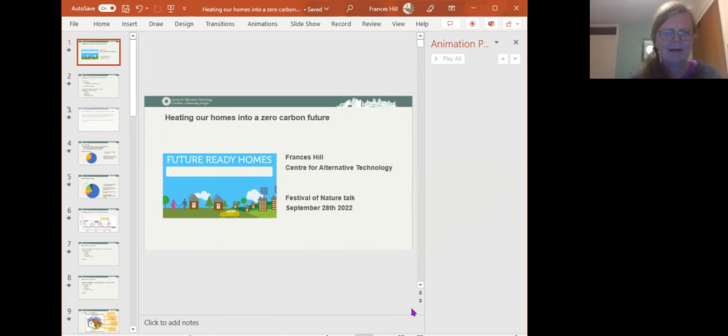Sorry, not entirely used to Zoom. Are you trying to put it into presentation mode? I am, there's a little icon just above design. All right, I've reached it, it was hiding behind my bottom bar there. Okay, there we go. Thank you.

Yeah, I teach through Microsoft Teams, which is a similar tool but different. They're all different. So yes, teaching at the Centre for Alternative Technology, we work more at the domestic level in terms of looking at zero carbon heating. Although we certainly do touch on commercial buildings as well, such as supermarkets, and the modelling of buildings to learn more. But fear not, I'm not heading onto supermarkets today.

So heating our homes into a zero carbon future, having our homes ready for the future, what do we need to do? We're going to first look at the challenge this evening, look at the current demand for heating and the current supply of energy available for heating.

We'll look at some routes to solutions, including insulation and air tightness to reduce demand, and alternatives to gas or oil, which most of us currently use for heating. These, of course, include electricity, hydrogen, heat pumps, and the possibility of heat networks.

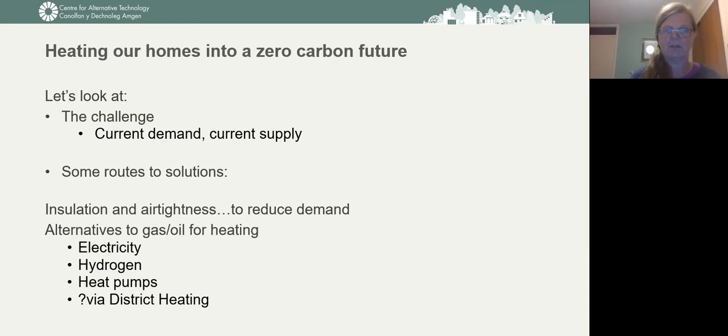So a statistic that is bandied around, or not necessarily with this number on it, but something like this: 41% of our energy is from renewables, which suggests that we're well on our way from not having had renewables essentially 20, 25 years ago, beyond burning wood. We're well on our way to being entirely energy supplied by renewables.

But how does that fit into the domestic energy use data, which we've got here? You can see that the majority of domestic energy use is gas, with 6 or 7% from bioenergy, 6 or 7% from oil, and maybe 25% from electricity. Very little anymore from coal.

So which part of that energy is from renewables? 41% doesn't readily fit in there. Well, in fact, about 3/4 of our energy is from fossil fuel, and about 1/4 is electricity. And that 41% is just 41% of our electricity provision that is from renewables.

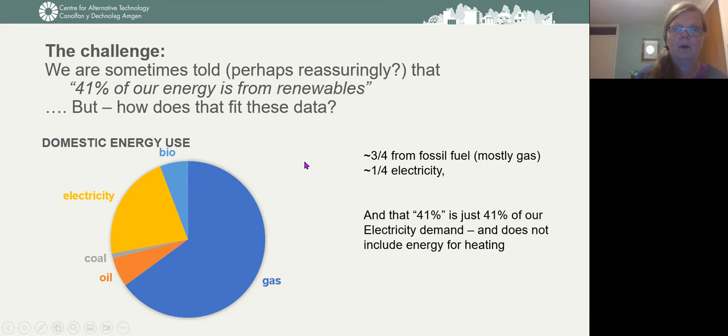So it's sort of that much of our energy supply, our energy use, not just our electricity use, our energy use. So that 41%, of which that is 41%, doesn't include the energy we use for heating, which makes it a wee bit frightening, really, when it comes down to it.

I mean, this is the electricity from renewables. We then have electricity from fossil fuel. We have electricity from nuclear, which is perhaps carbon neutral. Various people would argue in various directions on that.

All right, I need to keep moving my screen of people around so that I can see what's behind it. And if we think of biofuels as renewable, and that's contentious, because once you've taken a tree out of production and you burn the carbon, it takes a long time for that carbon dioxide to be sequestered again into the next tree that you're growing in the same plot, or the next tree you plant.

So these are the renewables, this is the energy from renewables. These might be considered low and zero carbon, but that still leaves 80% of our energy use as not even counting in those. So we've got quite a challenge if we're going to move not just our electricity demand, our current electricity demand, into renewables, but all of our energy demand into renewables.

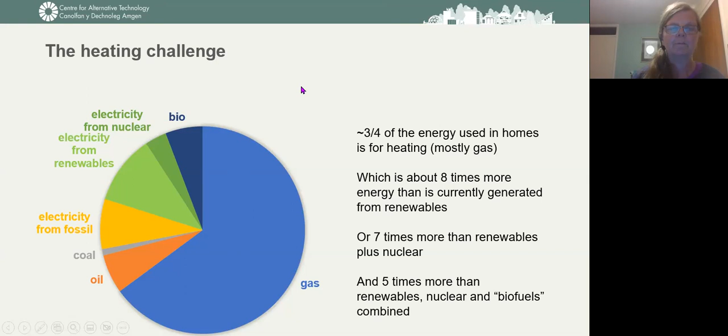Are we going to multiply up the energy electricity we're generating by a factor of 8 in order to be able to use electricity for all of this? That's a lot more wind farms, a lot more solar. We can probably do a lot. Can we get there?

The other side of the question is that heating demand is very seasonally dependent. And although this is the power that's generated sort of through the year, with more being generated in the winter than in the summer. That's hardly surprising. We're using our lights more in the winter than in the summer. We're driving more heating systems, as in, the pumps in heating systems and whatever else we're using more power for in the winter than in the summer.

That varies seasonally. But look at the heating demand, that's varying hugely. Can we actually supply all of the heating, all of the energy we need, the power we need in the winter, even if we can supply an average of the energy around the year? Transport is more even on here.

And yes, when we get something like the Beast from the East, this data run finished about 4 years ago, just after the Beast from the East, then we get a spike that's considerably higher than that, when our heating demand goes up very considerably. And we need to think, how can we provide for all of that heating dependence?

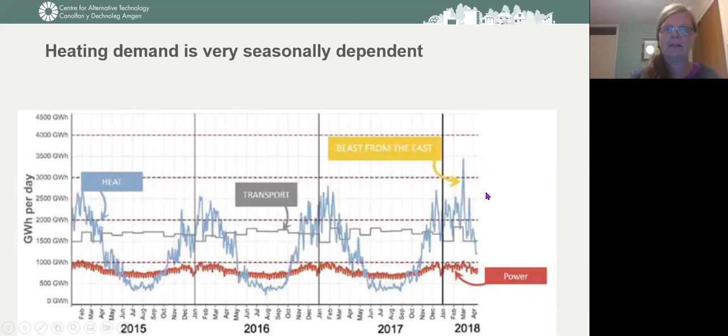So various different routes that we need to look at to solutions. We'll look at insulation and air tightness, but I think many of you will have been at Flo's talk on her house on insulation and air tightness, so we won't take a long time on that, but it is important. And we'll look at heating controls to reduce demand, and then alternatives to gas and oil. So first of all, insulation.

Looking at a standard house, where do we lose the heat from? You'll have all seen a picture something like this, with probably somewhat different figures on it. And all of our homes vary. They vary on how much of the external envelope of the house is walls. They vary on how much insulation there is where, and whether we've got double glazing.

But a broad picture average of home energy loss is that we lose maybe 25 to 30% through the walls, maybe 15% through the windows, maybe 30 to 35% through the roof, a lot through ventilation or air change. Ventilation is sometimes limited to mean intentional ventilation. I think here it's meaning all the air that comes and goes to the house that you didn't really intend to, as well as what you did. And then some up through chimneys perhaps, and out through the floor.

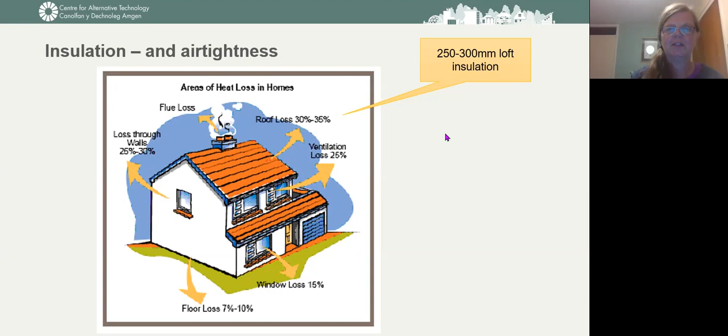We want to stop drafts and organize the ventilation so that we've got enough airflow, but not losing heat through the airflow more than we need, at least. So either extract ventilation that is perhaps humidity controlled and sits in your kitchen, your bathrooms, so that you're extracting from the smelly, damp places in the house, and unless you've got a really, really good airtight house like Flo, you're almost certainly going to be able to draw in enough air through the cracks and crevices that the house doesn't implode on itself. It won't implode on itself, don't worry about that.

Or mechanical ventilation with heat recovery. So that's balanced intake and extract ventilation with a heat recovery between the incoming air absorbing the heat from the outgoing air.

We want to insulate our cavity walls. Those of us who've got cavity walls, we may be wanting to insulate internally. We may be better off insulating externally, because right across the middle of the house there's floors that come to the wall, and insulating internally down to the floor and then up to the ceiling below, you've got quite a gap there that is really hard to get at. And you've got a problem with bridging there. So you're going to lose heat more readily through the area you can't insulate.

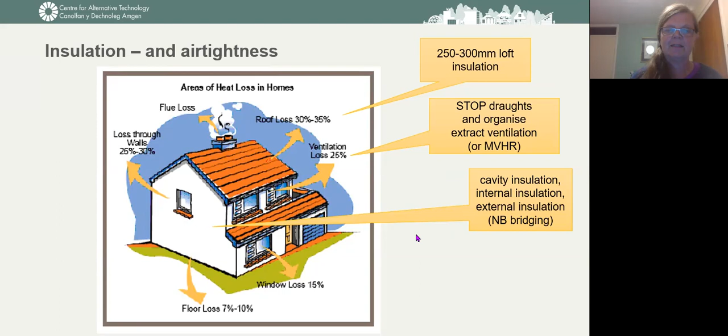And you're going to have a cold wall, usually with timbers going into it. And that can be a problem, because that's where moisture gets into the wall and into the timbers in the wall. And you don't really want moist, damp timbers sitting in a cold place where they could rather readily rot.

And then, you may be surprised that this doesn't come higher up the list: double or triple glazing. A glazing replacement is not a quick win. It's quite neat and easy to do compared to a lot of the others. It's quite expensive, and it is important to do it, but it doesn't necessarily come above these other measures that you can take.

Make sure double or triple glazing is carefully installed, because when we go back to stopping drafts, a lot of the places where you get drafts are around the frames of windows and doors and skirting boards, around ceilings and around lighting fittings and that sort of thing. But particularly there's a lot of edge around windows, and if they're not well installed, then they're hazardous for drafts, but heat loss around them as well.

So find somebody who knows how to install windows well. There are examples in Wilmslow who do it well, and there are examples in Wilmslow who don't.

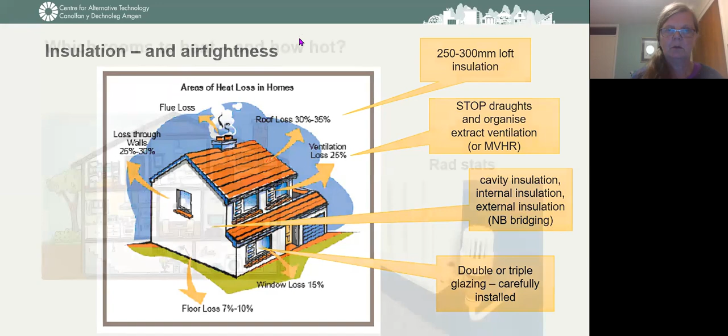So now we've got a house that's insulated as well as we've managed, draft proofed as well as we've managed. But even before we do that, we need to think about which rooms are we going to heat and how hot are we going to heat them to? Do we need to heat every room in the house, whether or not we live in it all the time?

Some of us may be able to have homes that have rooms that we don't use on a regular basis. Do we shut the doors on them and leave them to cool down a bit? Or do we heat them sort of to the same as every other room? Questions to consider there. How hot, how warm do we need our homes to be? Do we need the same temperature in every room? Or can we use radiator thermostats to control the temperatures in the different rooms?

Maybe you want a bit of heat in all the rooms, but you don't need as much in quite all of them. You need a higher temperature when you're sitting down still. The room I'm sitting in at the moment is my home office. I share it with the hot water cylinder, the airing cupboard. It was a bedroom once, and it has the airing cupboard in it.

And that means that whenever the well-insulated hot water cylinder leaks any heat from it, and it does through the pipework to and fro, whenever it leaks heat, I actually benefit. So I sit here bathing in waste heat. Well, the room stays a degree or two warmer than the other side of the door as a result of heat losses from that. In the summer, I can open the window. It doesn't need to worry me that I'm getting extra warm then.

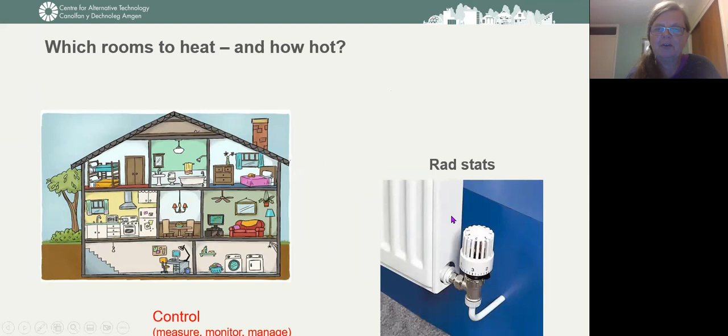So, and then, control, measure, monitor, and manage. Control the temperature, measure it perhaps, use a thermostat to measure it and manage it that way, and possibly manage it by additional controls. Avoid heating unnecessarily, use a timer. I'm aghast when neighbours go away for the weekend and I see the steam plume out of their boiler pouring out into the air. For a start, a boiler shouldn't particularly have much of a steam plume if it's been well

commissioned. A bit, yes. But if you're away for the weekend, how much heating does the house need on? If you're away for the day, how much heating do you need on? Do you need the whole house as warm at night as you need some rooms during the day? How can you manage that?

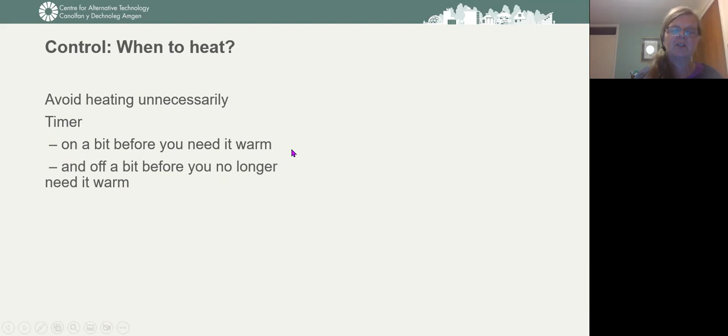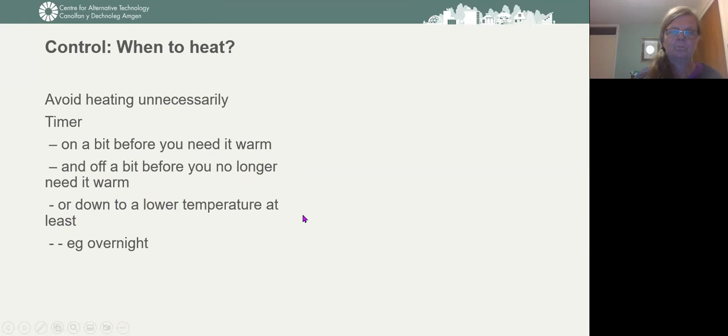So suggestions for a timer: that you might have the heating on for half an hour before you need the house to be at full warmth, and probably be able to turn it off half an hour before you no longer need it warm. Or maybe just turn it down to a lower temperature at least, for example, overnight. Do you live in a castle or do you live in a tent?

Some of our homes are thermally massive with a lot of hard stone surfaces that absorb a lot of heat as the sun comes in, or even wooden surfaces can do that a lot. But carpeted floors insulate the floor, so heat isn't absorbed into the floor. A castle takes a very, very long time to heat up. But a yurt or a portacabin, which is perhaps more familiar to us, just not as attractive as a picture, is much quicker to heat up.

You can pop a wood stove in the middle of a yurt and you can very quickly have warm space in there. Appallingly badly insulated. I'm not advocating living in a yurt, not in a British climate at least, but they do heat up quickly because they've got no thermal mass in the walls to absorb that heat. A portacabin's like that, a site hut. You go into it, you can put the heating on and it'll be quickly hot. Turn the heating off and it doesn't hang around.

Whereas your castle, if you've got a room warm, and you may never be able to get a room warm in a castle, or many churches struggle with getting warm, they take a long time to cool down again. They hold on to that heat and they keep redelivering it. So is your home more of a castle or more of a portacabin, more of a tent? That will determine how long you need your timer on before the house really is warmed up, and how long you can turn it off before you no longer need to be comfortably warm.

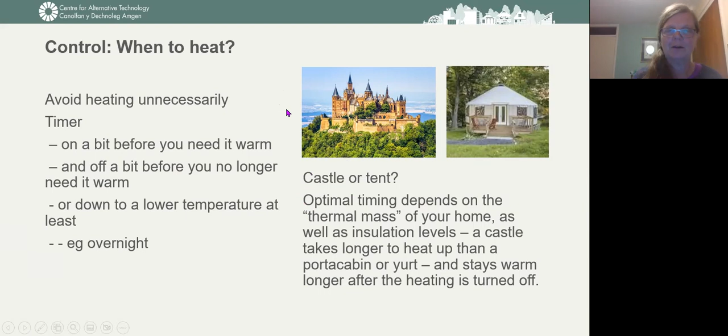I mean, if you were living in a castle, you can let the fire die down or whatever a few hours before bedtime, because the walls will still be as warm as they ever were, unless you're relying on the radiant heat from the fire and enjoying that. That's a different story.

So smart controls, of course, are quite possible by phone or by tablet or whatever. Now, remote timing, managing your central heating from a distance. When you're on the way home on the train, you can turn it on.

Hopefully you've set it so that it'll go off when you leave the house or before you leave the house in the morning. It may even include GPS, sensing when you're on your way home and turn it on for you. It may include weather reference, so that when the weather's warmer, it reduces the heating. When it's colder, it turns it up for you, or it turns it on sooner and gets it ready.

These sorts of controls may have multiple users, so different members of the household may be able to manage it. I could quite imagine that that could enable quite a lot of contest between different occupants of the house. Ever noticed anybody else going to change the thermostat that you thought was okay? We don't all want the same things. We don't all necessarily feel it works the same way.

But anyway, some of these smart devices can learn household habits, so they can expect that the house is broadly likely to be empty Monday to Friday between 8 and 5 or whatever like that, and keep the heating turned down at that point, but have it ready for people to get up in the morning at 6:30 or 7 o'clock or whatever the household needs. And yes, they can cope with daily patterns across a week, as well as hours across the day.

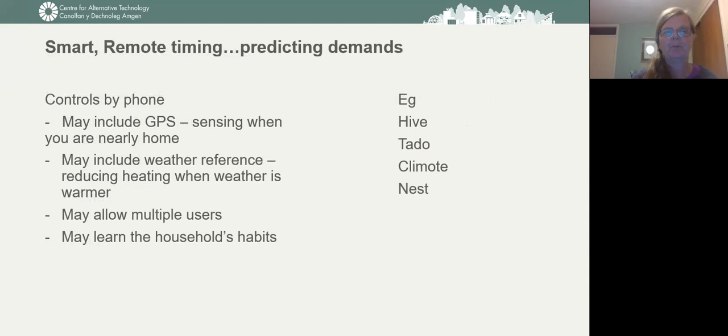Examples of these smart ones, there will be more, but Hive, Nest, Tado, Climote are names that come up for smart in that sort of way. So we've looked at controlling the heating demand. We've done that as much as we can, or we're going to do that as much as we can. How are we going to heat our homes?

We know that we can't go on using gas and oil, burning hydrocarbons, producing carbon dioxide, increasing the level of carbon dioxide in the air. And anyway, there's a limit to how much gas and oil there ever was. The Centre for Alternative Technology, where I teach, started 45, 50 years ago, actually looking at alternative technologies being needed because we were running out of gas and oil. Of course, the focus has changed to looking at climate change, looking at sustainability across the environment, as well as climate change. But we've got a lot of reasons to be moving away from gas and oil.

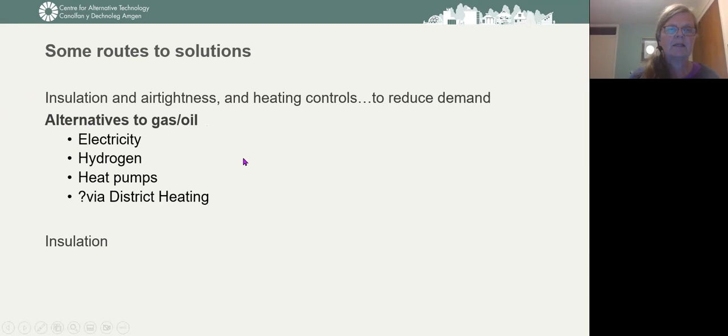So let's look at electricity, which we know how to do very easily. We've got fan heaters, we've got radiant heaters, we've got radiators, which aren't radiant heaters, they're mostly convectors. And we've got combinations, and some of them are smarter, and we might choose different types for different reasons. But over a year, we're going to need more electricity than we're currently generating from renewables if we go this route of just using electricity to produce heat.

And we're going to need 6, 8, 10 times more in winter than we are in summer. Can we generate 6 or 8 or 10 times more in winter than we can in summer? Anybody who's got PV on the roof, does yours generate more in winter or in summer? Well, I'm guessing I know the answer and you know the answer. And it's not the way around that we want it.

It does tend to be windier in the winter, not necessarily that much windier, not necessarily 8 or 10 times windier in the winter. And sometimes we get really quiet spells for as much as 3 weeks at a time. So we're definitely going to need storage.

We can store heat. If you wanted to store enough heat to heat your home through the winter, a back of an envelope calculation suggests that you could store that much heat by having a swimming pool type tank built underneath your house, but that would need to have approximately the same volume as your whole house, be filled with that much water, and not spring leaks, if you're going to hold as much heat as you use in the house in water over the winter.

What was next on that list? Hydrogen. Well, hydrogen is, of course, the answer to everything, we all know that. You can get hydrogen from splitting up water. There's plenty of hydrogen around in the water, and we can burn hydrogen. Hydrogen burns with a pop from a test tube at school. You can actually burn it either in a mixture with methane, which is the gas you use in your cooker, or on its own. And it can produce high temperatures if it's organized to do so.

You can get a boiler that's suited to hydrogen. You can compress and store hydrogen to some extent in the distribution network, which gives you some security of supply. And that's great because we've been talking about the challenge of storage, and that's really important. So yep, there's some big advantages to hydrogen.

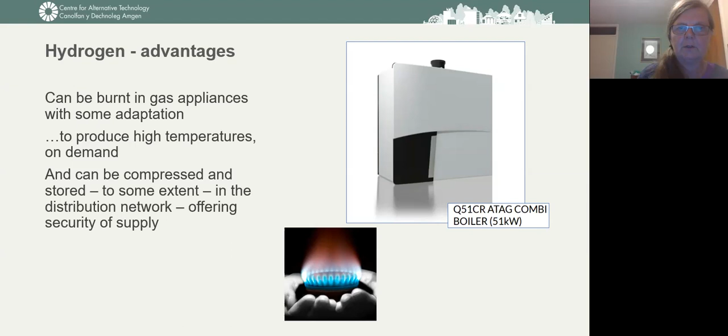But you may have heard in my voice, it's not all advantages. Hydrogen is quite expensive to produce. If you're using electricity for electrolyzing water, splitting that H2O into H2 and O2, then you can be up to 80% efficient, so you're only losing about a fifth of the original energy. Hydrogen can be produced this way and is produced this way, but about 0.1%, that's a thousandth of the hydrogen currently produced, is produced this way. This sort is known as green hydrogen - green in terms of environmentally about as good as you can get.

The more common way of producing hydrogen is by steam reforming natural gas, methane. So CH4, methane - carbon and hydrogen combined with oxygen, or combined with water, to produce carbon dioxide and hydrogen. So with steam, water vapor, and the hydrogen produced this way is known as grey hydrogen.

Now, we don't want that carbon dioxide - well, we don't want very much of it. You may want fizzy drinks, and you may be interested in the brewing industry, and there are various industrial processes that need carbon dioxide. So we need some of it for a few things, but we don't need anything like as much as if we were producing all the hydrogen we need for heating, all the energy we need for heating, this way. So we've got a challenge with the CO2 that we're producing.

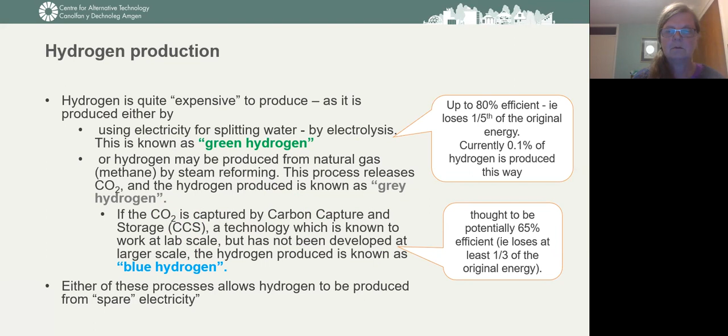So hydrogen's got a variety of uses. We can drive electric cars - that's just fine, and I'm sure a number of you have electric cars and find they're working well. Hydrogen's an alternative for cars; hydrogen may be a better alternative for heavy transport - trains, tractors, aeroplanes - that would need extra substantial batteries and whatever. Aeroplanes are never going to be able to carry enough battery to run very far on electricity. They might be able to manage that more usefully on hydrogen.

So it's got the potential for energy storage for electricity generation when wind and solar run out. Basically, those three weeks in January when the wind's dropped and you've got precious little solar hitting your PVs, we need some resilience in the system there. But we can only use every unit of hydrogen once. So every cubic meter that we've generated from electrolysis or steam reformation, we can only either use it in a car or a tractor to produce food, or in a lorry or train to transport that food or other products around, or we can use it for heating. We can't use that same cubic meter, that same kilowatt hour, even down to smaller units, for everything. So we've got some challenges there.

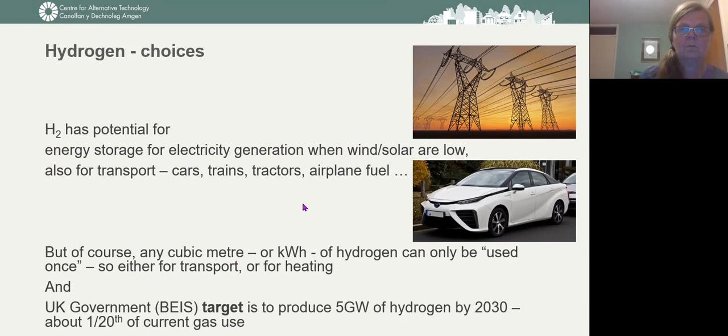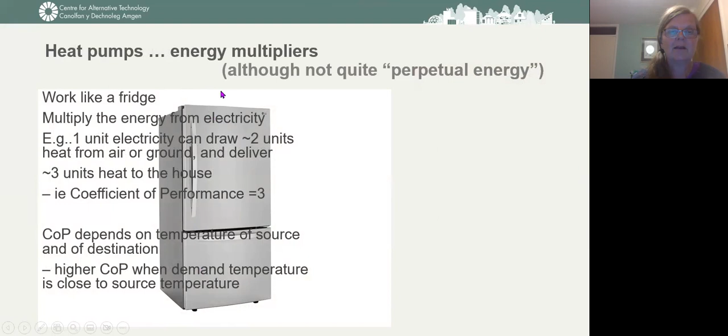Heat pumps are another way of providing heat in homes. They're energy multipliers - they can move energy from one place to another and multiply it. They work rather like this domestic fridge, and I'll remove that so we can see the words. They multiply the energy from electricity. So, using a single unit of electricity, they can draw perhaps 2 units of heat from the air, ground, or water, and deliver 3 units of heat into the house. On that basis, that heat pump would have a coefficient of performance of 3 - 1 unit of electricity delivering 3 units of heat to the house.

At different source temperatures - that's air, water or ground temperatures - and different destination temperatures - that's your underfloor heating, radiators or hot water tank - your coefficient of performance is going to be different.

You get a higher coefficient of performance when the demand temperature is close to the source temperature, when it doesn't have to do very much work. It's more efficient. Coefficient of performance is a sort of efficiency, essentially, in lots of ways.

So 1 unit of electricity joining up with 2 units of heat from the air or the ground, producing 3 units of energy delivered to heat, gives a coefficient of performance of 3, a COP. Now just think about the temperatures of source and destination. When you need to heat the house, is that when it's warmer or colder outside?

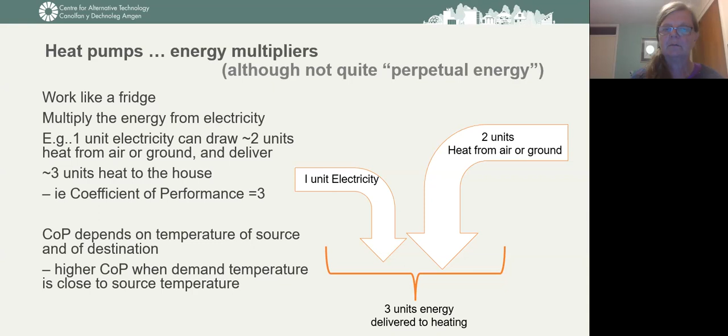Your fridge in your kitchen is taking heat from that bottle of milk that you put in it and dumping it out of the back into your kitchen. It's moving heat from one place to another, using electricity to do it, moving it from a cooler place to a hotter place. The laws of physics say you can't do it without putting extra energy in, so you put extra energy in and you do it. You need to use electricity to do it.

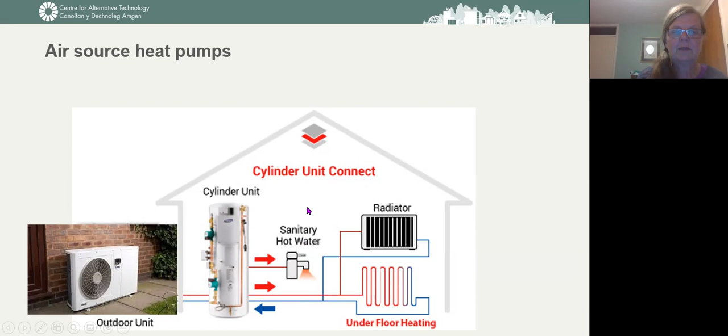A typical coefficient of performance, you can see how that varies between the underfloor heating, where the delivery temperature is 35 degrees, underfloor heating at a typical coefficient of performance perhaps of 3.

Large radiators, quite often it makes sense to double the thickness of your radiators, perhaps to expand the area of them, in order to be able to heat the rooms with water at 45 to 50 in the radiators, rather than the standard sort of 55 to 60 plus that we mostly use. So the coefficient of performance for that is perhaps 2.5.

And then for hot water, higher temperature, 60 degrees is recommended for storage, a typical coefficient of performance of under 2. So it's still doing better, still multiplying, that's bigger than 1. And this is for an air temperature in the winter, 0 to 4 degrees. This is when we need most of our heating.

But ground source heat pumps are more efficient. Oh yes, sorry, seasonal performance factor. In the summer, the coefficient of performance may be much better because your underfloor heating is 35, and the temperature outside the house is 20, not 0 to 4. Mind you, if it's 20, I don't know why you'd need any heating on at all, but the coefficient of performance at that point would be higher.

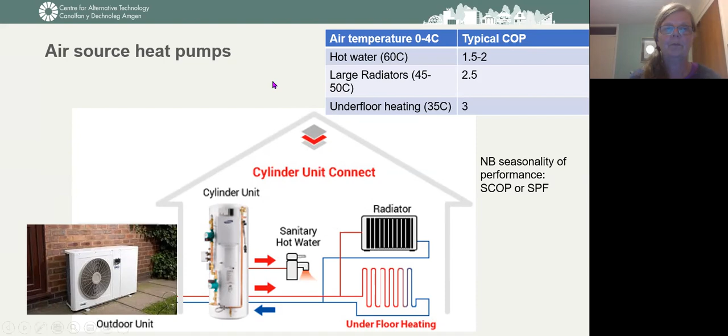And you'll have heard of ground source heat pumps. With a fair amount of digging, you can lay coils under the ground in your garden or under the road, or you can lay them vertically down boreholes. You need quite an area of them, at least the same sort of size as the house, and that's for a well-insulated house.

So that's quite a lot of disruption to your garden, and you need to go deep, because the whole point of a ground source heat pump is your ground temperature stays warmer in the winter than the air does. The air temperature may drop down to 0, -5, or -10 from time to time in the winter, but the ground temperature in December and January will not likely go below about 8 degrees. It's the average year-round temperature of the air around the surface of the ground.

And because that gives us a narrower difference between the temperature under the ground and the temperature your underfloor heating needs, 35 degrees, then you've got a higher coefficient of performance, and a higher one for the radiators and a higher one for the hot water than the air source heat pumps. Setting these next to each other, you can see the comparison there — those are air source heat pump and ground source heat pump figures.

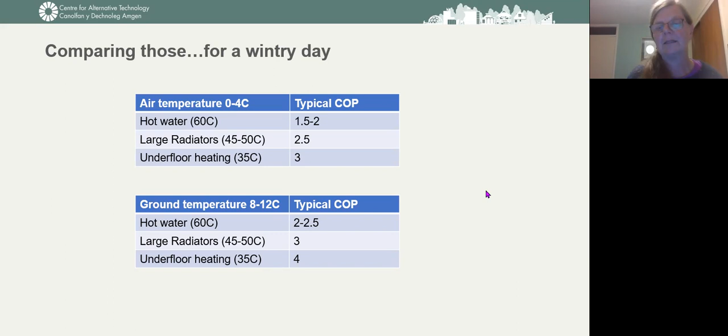Does extracting heat from a ground source lower the temperature of the ground, making the system less efficient over time? It's really important to keep the thing in balance. That's why you have quite so much area of coils in the ground, so you're only taking a small amount of heat out and give the ground time to recover. It's got the capacity to recover.

You can actually use a ground source heat pump also in cooling mode, so you can take heat out of the house and dump it into the ground, and that possibly improves the recovery of the ground temperature and the readiness of the temperature you can achieve. If you were needing to cool during the day and heat during the night, that would be perfect. The ground 5 feet, 2 meters under isn't going to hold very much heat between summer and winter.

But to the extent of adding extra heat, it does obviously hold heat - that's why the temperature stays at 8 to 12. It depends very much on whether you're on clay, sand, gravel, whether you've got water running through it, whether you've got air spaces. The conductivity around the loops, the ground source heat coil, is particularly important on that.

Ian B was asking about noise pollution, presumably from the fans, from the heat pump units, the air source heat pump units.

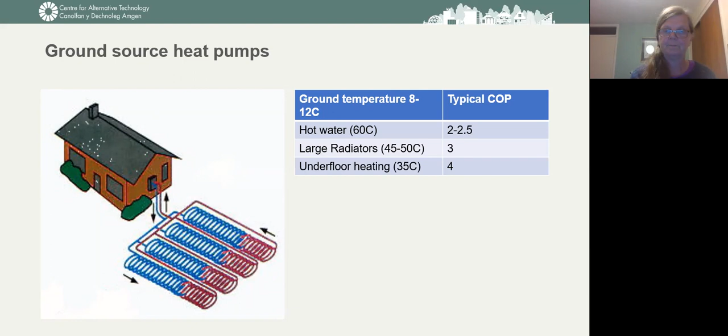Currently, heat pumps are expensive. Ground source heat pumps are more expensive than air source heat pumps because of the groundworks that are needed. The technology itself, once you get the machinery there, possibly is more expensive simply because there must be at least 20 air source heat pumps sold for every ground source heat pump, and we know the benefits of scale on that sort of thing. But essentially it's the groundworks - you can bore a hole into the ground, that's going to cost you money too.

And then of course we're using electricity, and currently electricity costs us a lot more than gas. There's all sorts going on at the moment about whether or not it should, particularly if your electricity is coming from a green supplier - Good Energy, Ecotricity, who are generating most of their electricity from wind turbines and solar - much cheaper than gas is becoming. So watch this space in terms of the relative cost of electricity and gas, and therefore potentially the increasing viability of heat pumps. Let's hope so.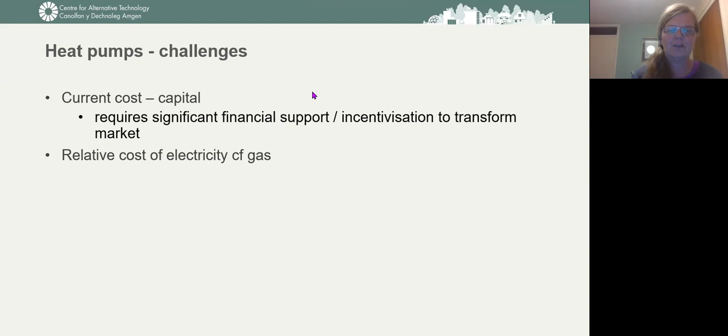To some extent, it needs enough of us buying heat pumps to transform the market and bring the cost down. Some of you bought solar PV and installed it on the roof years ago, and got really good incentivization to do so. The feed-in tariff was incentivizing you to build a market in photovoltaics, and the cost of putting PV on the roof has dropped by about 80%, which is why we no longer have feed-in tariffs - the government reckons it's done that job well. If we could have similar incentivization for heat pumps, there's no real reason to suppose it wouldn't do the same. Heat pumps wouldn't necessarily become significantly more efficient, but they would become cheaper.

And then, of course, when it comes to the cost of electricity and gas, we're talking politics here about where there's a subsidy, what's taxed. At the moment, taxes are on electricity and not on gas, which is pushing up the price of electricity and keeping gas prices down.

Heat pump installers - are there specific industry standards or qualifications we should be looking for? I'm not an expert on that, I'm really sorry. There is a heat pump industry body you'd go to find out more. If you'd like to drop me an email, I'll rack my brains and contact the person I know who would know that, and see if I can answer that one.

So yes, we just talked about the positioning of air source heat pumps on small houses. So where do we go from there?

We've sort of said electricity is too expensive to use, in terms of we can't generate enough of it to just use electricity. We've talked about hydrogen, and the prospects of producing enough hydrogen to be using that for heating in anything like the near future are pretty small. Heat pumps - there's some quite significant challenges.

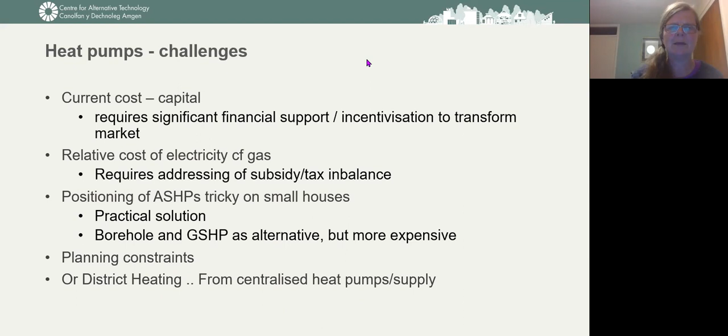I've lost track of what time it is. Can somebody tell me? Gone 8:30. We're doing okay then. Thank you - I kept my phone out of here so it didn't disturb. We're doing fine, we're doing fine. Thanks. I kept my phone out of here so it didn't disturb, I can't deal with it.

So we're on to district heating. A heating network may be useful. We still are burning waste, incinerating waste, as well as sending it to landfill, and why should we be wasting that heat? Unfortunately, most of us don't choose to live near incinerator plants and have it readily available to use as heat in our homes.

Heat can be transported, it can be piped. In Bristol, they're actually talking of putting hot water from the incinerator out at Avonmouth into barges to bring up into the city centre to feed a heating network there. I don't think we're going to be doing that in Handforth or Wilmslow, but heat is to some extent transportable, and we can accumulate heat - this is just one source.

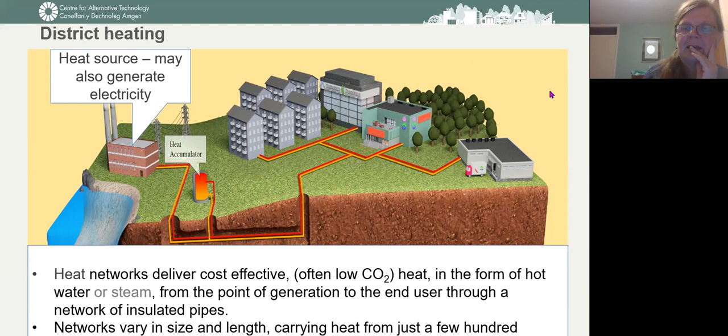I think there's quite a tension between permissions on planning and the needs of moving forward to help manage climate impacts. I'll leave that there for now. Float that idea and leave it for now.

So yes, networks for heating can vary a lot in size and length. Copenhagen as a city is very largely heat networked. Universities, hospitals may well be heat networked. They may or may not be using sustainable heating, but where there's a heat network already, perhaps you can use that. Perhaps you can add to the heat in it initially by using ground source heat pumps and gradually increase the amount of sustainable heating that's going into the network.

It can be water, it can be steam. I don't think you'd get very far in terms of heat networks from heat pumps by using steam, simply because you're talking of such a high temperature there. You can use heat networks at a variety of different temperatures. It would be possible in this sort of setting to be moving hot water around the system at a quite intermediate temperature. You could be delivering it at the temperature that you need for your hot water at 60, or you could be moving it around at something more like 35.

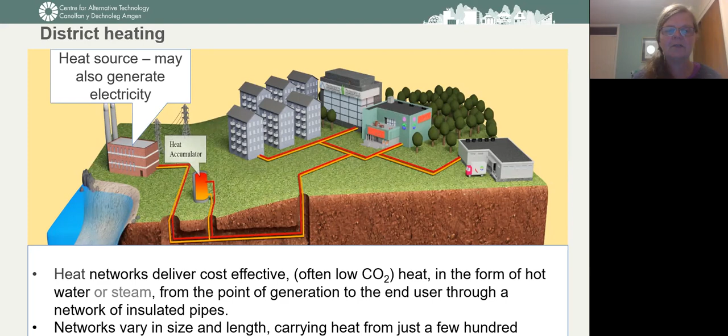And if you're moving it around at 35, you could have individual heat pumps in each block of flats or even in each individual home that were able to draw heat from 35 degrees and boost it to 60, rather than having to draw it from the outside air at 4 degrees in winter, let's say, and boost it to 60 at a much lower coefficient of performance. So there are different ways of integrating the different possibilities. That's what your district heating transfer systems might look like.

Digging great trenches like that, which will be covered over, of course, afterwards, and you're looking at really well insulated pipework with a flow and return. You can have flow and return in the same insulated bond for smaller heat networks, but these would be one each of those. You've got slightly less insulation on your return because you're bringing it back cooler.

And heat networks can be supplied from a whole series of different sources, all on one network, in the same way that our electricity grid is supplied from a series of different generators. Your power stations don't just generate electricity, they actually probably produce twice as much heat as they do electricity.

Our thermal power stations, whether they're thermal nuclear or whether they're thermal coal, oil, or even the gas turbine, are producing a lot of heat along with the electricity they're generating. Energy from waste, incinerators, or whatever process they're using. A lot of industrial and commercial processes are needing to get rid of heat.

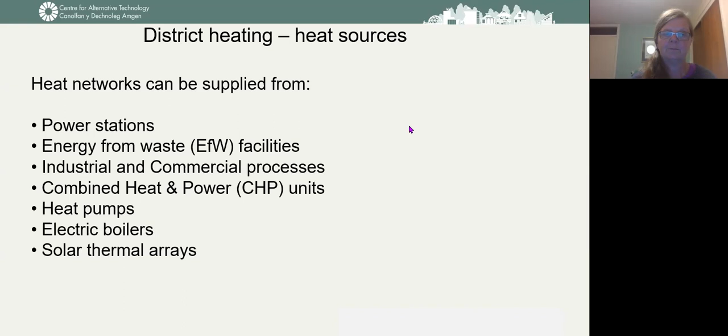They might need to use a heat pump to achieve temperatures that are appropriate. Or we might be using heat pumps to extract heat from the air or from the delivery roads around, or from the playing fields, or whatever else. It's quite possible to use electric boilers to add to the heat in heat networks, and we might be using solar thermal arrays. We might have huge solar thermal arrays that were able to add usefully to heat networks. We've never really looked at huge solar thermal arrays here, but they are known. They've happened elsewhere.

And of course, you don't just need to be producing as much heat at 6 o'clock in the afternoon as you're using at 6 o'clock in the afternoon. You can put your heat into hot water tanks, essentially thermal stores, and draw the heat out on the other side of that. So you can build up heat in a store and draw it down. So you've got essentially a heat battery there to smooth your variations in energy supply and demand.

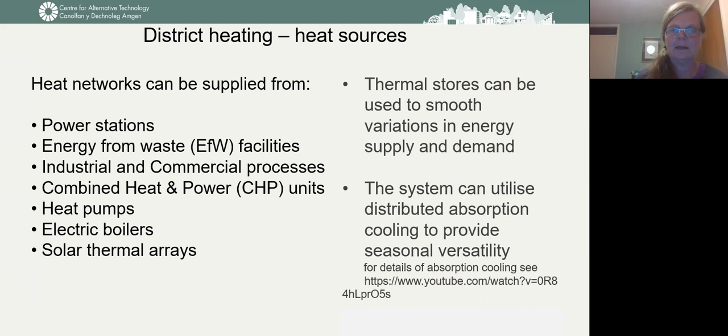And they can be used for cooling. And that's a bit of a different story. If you want to look at absorption cooling, which uses heat for a cooling process, then absorption or adsorption cooling, but there's a nice YouTube that you can put into your internet, okay, search engine, and get there.

And oh right, okay, I've duplicated that, sorry.

And if you're using a heat network at intermediate temperatures, then you could be cooling offices that are overheating, for example. Offices with a lot of people in and a lot of IT and lighting as well, and sun coming in the windows very readily overheat and need a cooling process. So you've got air conditioning going on. Well, you could be using your heat network to improve the efficiency of that cooling.

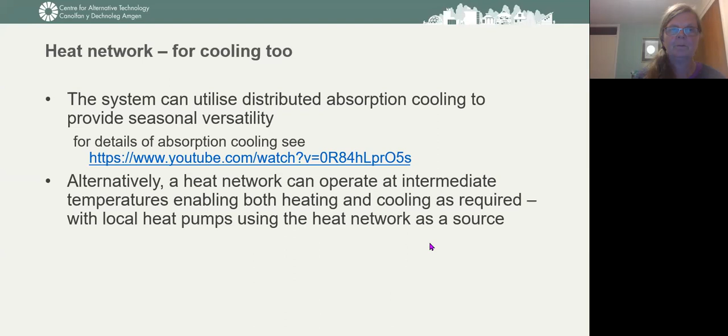So in summary, there's no one solution fits all. Our different homes and offices and schools and whatever else need subtly different approaches. But priority is going to be to reduce your demand. Reduce it by air tightness, by insulation, and by control and management. And I should have put that to animate so that went red, because that's the first and most really important. But then, well, I mean, they're all important.

Ideally, probably a district heating or heat pump system, because we're not there yet with producing enough hydrogen. We're not there yet with producing enough electricity to go for direct electric heating. So we're going to need to go for heat pumps and or district heating in order to achieve it. In order to size your heat pump, you really need to know the size of your heat demand, which does mean that you really need to do your demand reduction first, or at least know what you're doing in terms of demand reduction so that you get a heat pump that's the right sort of scale.

It's much more important to do that than it actually is with a gas boiler. A plumber will probably put in a gas boiler that's about twice the size that you need, because that's a reasonable level of resilience. Well, you don't want a heat pump turning on and off and turning on and off. It's not good for it to do that. So it needs to be sized more precisely than that.

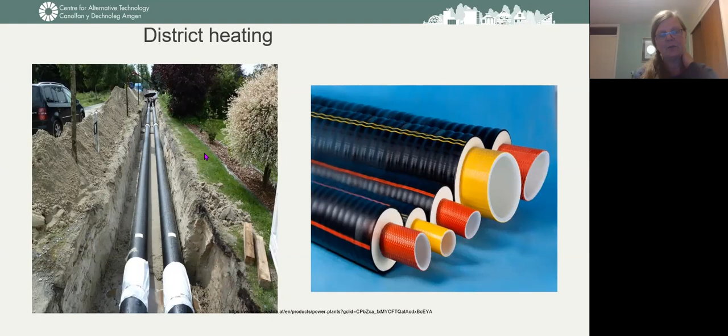So if you've got high density terraced housing or blocks of flats, or your blocks of flats with a school, blocks of flats with industry and whatever, you haven't got so far to take things, then you've got more potential for district heating.

Pardon me. I need that glass of water, Helen. I've got one for you.

So essentially, we really need political policy to support and incentivize transition to heat pumps and district heating, and to do it properly. And I think that's really where that comes to.

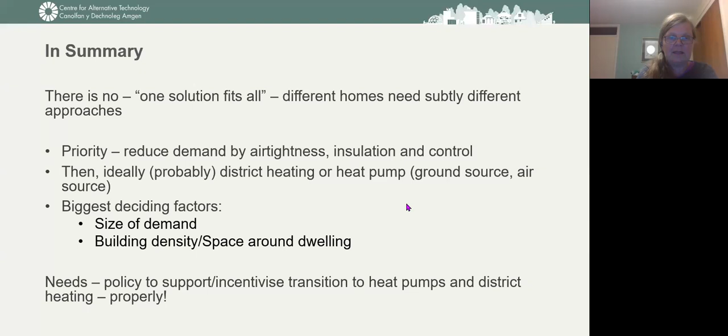I've got a series of resources here, as always, the Energy Saving Trust, but also the London Energy Transformation Initiative, LETI, is great for information on this sort of thing. Regen, I can't remember what that stands for, if it stands for something. It's renewable energy generation, I think, essentially, and it's a part of the generation distribution network with anchors in Wales and the southwest, and I'm not sure where else.

And then Energy Systems Catapult, and the documents that I would start you off with on this, quite apart from their websites: the Climate Emergency Retrofit Guide from LETI, Decarbonisation of Heat from Regen, and Innovating to Net Zero from Energy Systems Catapult.

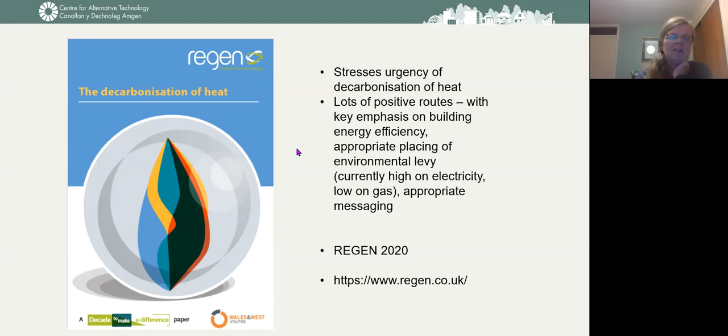Innovating to Net Zero and the Decarbonisation of Heat are both quite good on where the politics of the charging for gas and electricity, the policies on those, need to go. Innovating to Net Zero is assuming that carbon capture and storage is going to happen. So I would critique it on that, but there we go. It's got a lot of other good stuff in it.

It's much more focused on electricity, Innovating to Net Zero. And I think really, we've done a lot of the thinking on electricity. We've got to work out how to do the heating side of it.

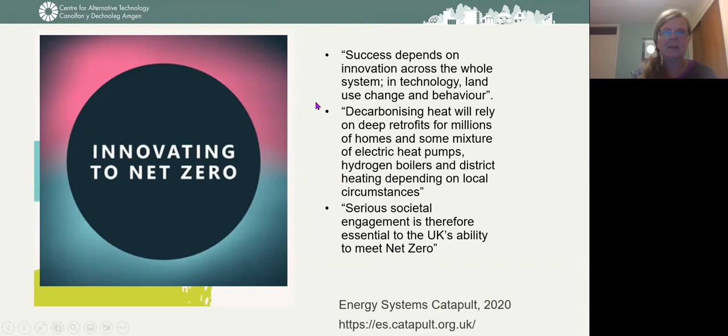Over to you, Stuart. Frances, that is absolutely amazing. That is really, really interesting. Can I kick off with just one observation from myself?

And that is, I was really surprised at the low percentage of demand met by nuclear. Bearing in mind the cost and the infrastructure and the gestation time on nuclear, that disappoints me. Am I alone in that, or was I just expecting too much? I think that's for other people here rather than me.

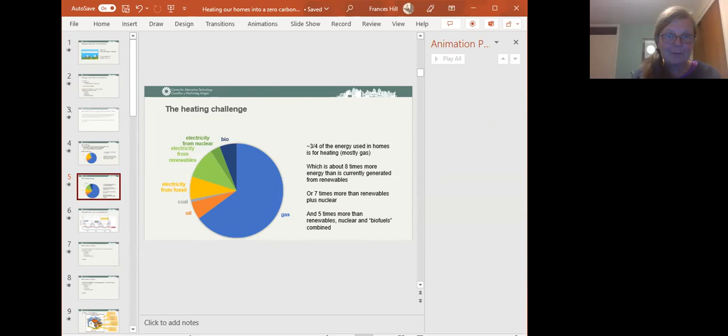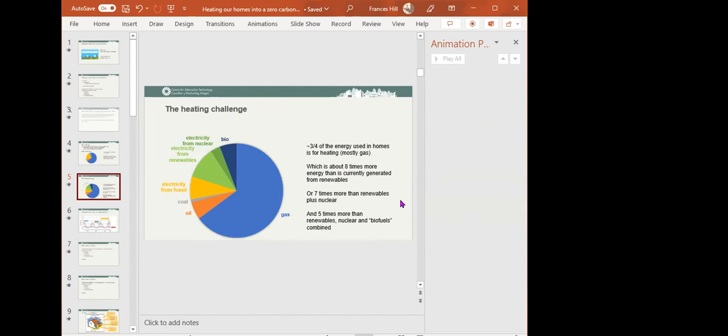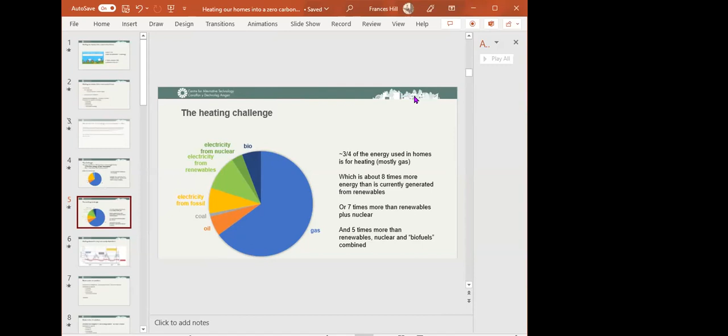Stuart, in the nuclear industry, a lot of the Magnox reactors are very aged. And there's quite a lot of research being done at Manchester University on how their life can be extended. It's the graphite moderators that are causing the problem. Their life has been extended, but they are going to be put in as a base load for wind and solar, because recently we've not been getting much wind at all. You can actually see what your generation is hour by hour by looking at certain websites.

But getting back to the nuclear, what they're doing is putting in new stations, and Rolls-Royce are going to develop a medium-sized nuclear station which can be used for base load. But the amount of electricity that was generated went up to about 20% on nuclear, and it's often base load. But they're being retired, and a lot have been taken out of service.

Right, they are indeed. But France is expanding again. So we've passed the peak for the moment in terms of proportion. Yes, they've been neglected, and I think because they thought that we had cheap gas.

A bit the same with district heating. District heating is a wonderful system. The trouble was that cheap gas came along. There weren't good heat meters. It was installed pretty badly. You could see where the mains were on a cold day because the snow melted above them. And they were a great problem.

A district heating system was using 50% of its energy in the summer just for domestic hot water because the losses were so bad. So we did a very bad job, but a lot of the London big estates, like the Roehampton one, which looks over Richmond Park, were actually designed with district heating schemes in. And they're a first-class system if they're done properly, but we go for the cheapest cost and we get a shoddy job that doesn't work.

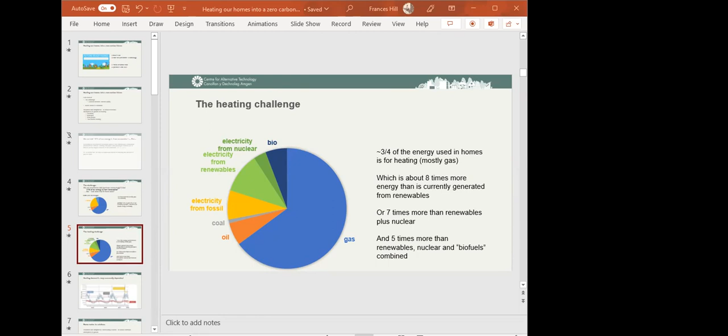Well, that's absolutely fantastic. Following up from what Mel's saying there, wearing clothes that warm you, not just that keep you warm. It's an interesting exploration, I think there's got to be some testing done to see how that works for people. We'll all be walking around with our USB wires looking for a plug-in. Yes, don't let's go back to little charcoal burners under our skirts, please. We're doing pretty well. Have we got any more questions?

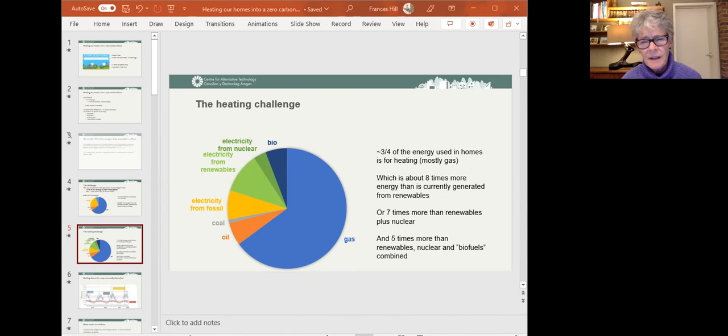I really appreciate Frances going through everything in such measured detail and focus. I was hoping that hydrogen was nearer — everybody's getting new gas boilers that are hydrogen ready — but it seems we may still have some time to wait. I really liked the opening of your talk, Frances, because it reminded me of Tim Harford on More or Less, with that statistic of 41% being a complete red herring in a way.

I'm very interested, because I am all electric, in the tax subsidy switching from renewable electricity sources to the expense of carbon, of fossil fuels, but we're still stuck in that. I really look forward to that changing, but thank you for flagging that up. It just seems unfair that electricity is still more expensive than gas.

Thank you for highlighting the colours of hydrogen, I've made a note of that. Might be we can make up some kind of rainbow song about that, perhaps, to get clearer. And I think, as ever, the rallying cry politically to government is for more joined up thinking. We look at new estates going up all the time, and you're thinking, well, there's an opportunity, while you're digging up the earth, to put in some ground source heat pumps and make sure everybody has access to a good fossil-free form of heating. But I bet your bottom dollar that's not happening yet.